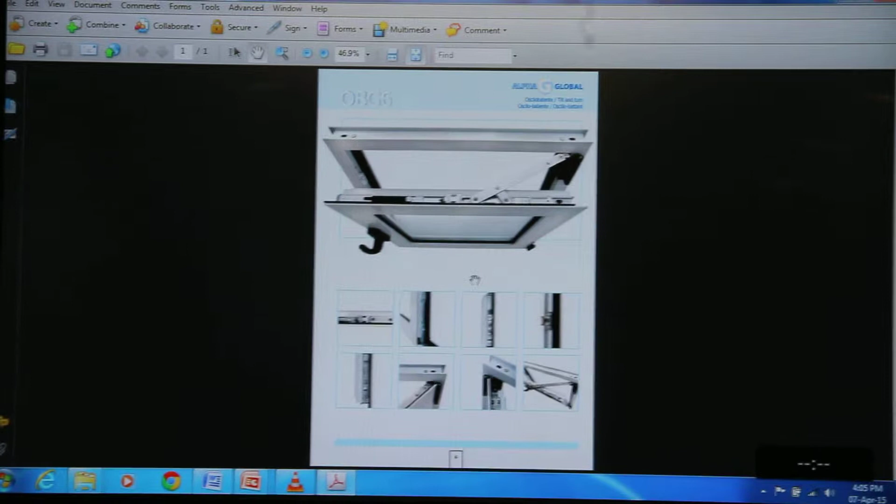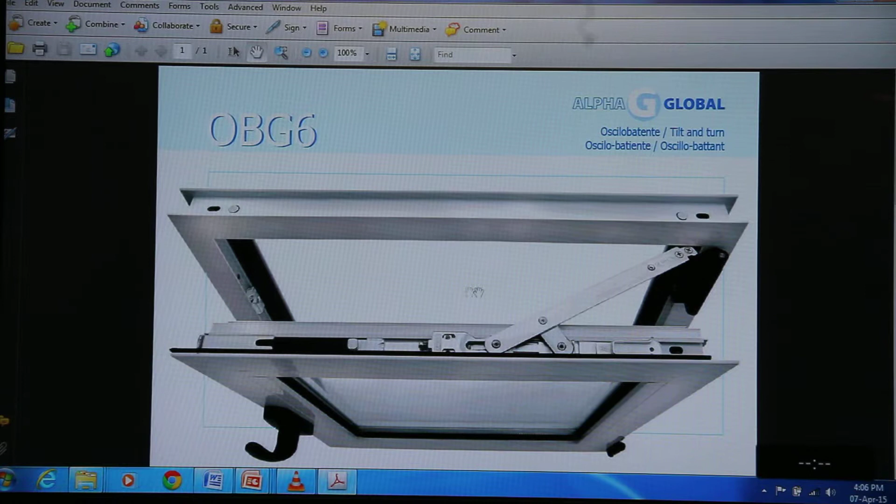Now let's see some specified window arrangements. This is the Alpha Global giving the hardware for the particular specified windows like tilt and turn windows, that is called the OBG6. We have the full kits of tilt and turn, in which first we need to understand what is the meaning of tilt and turn.

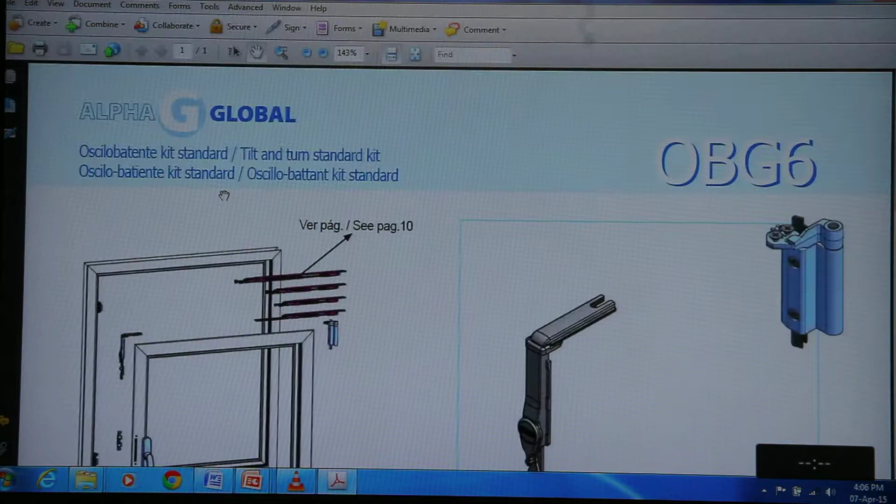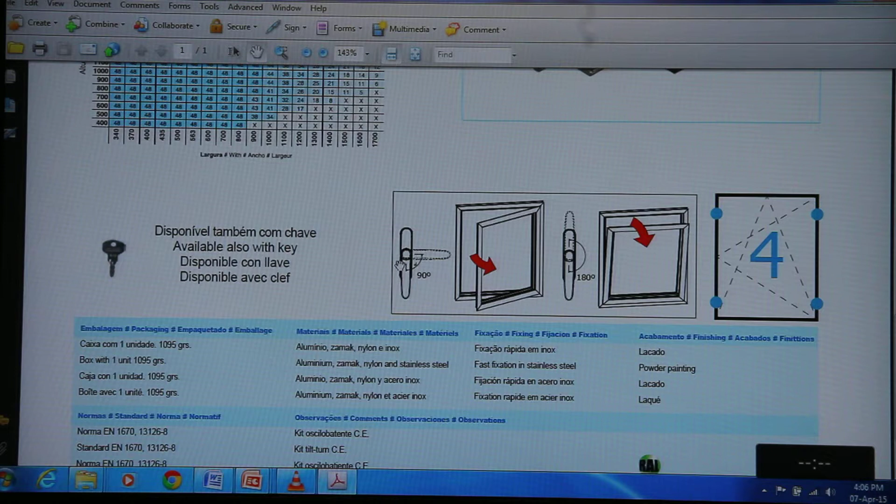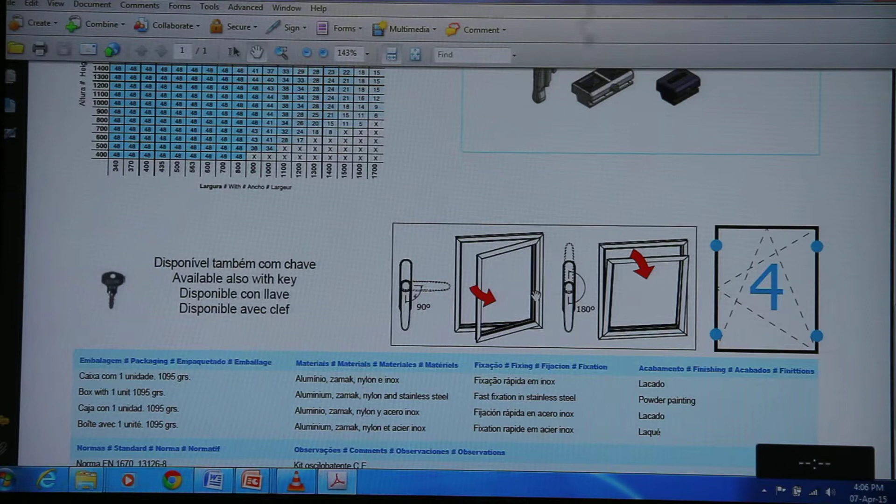Tilt and turn means you can first let the window tilt and then turn it, or you can first turn the window and tilt it after that. If you want to turn this window fully open, you can open it at 90 degrees. If the handle position is at 90 degrees, the window will open like a side hung window, and you will get full ventilation throughout. You can get cross ventilation.

If the handle is at 180 degrees, just against the floor, this portion will be open, and all the heat will be released from these sides. So this is called the 4 point locking.

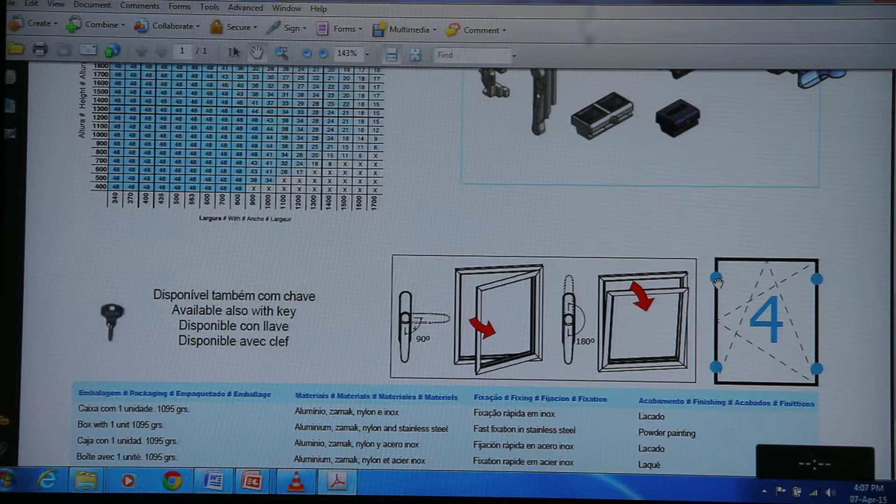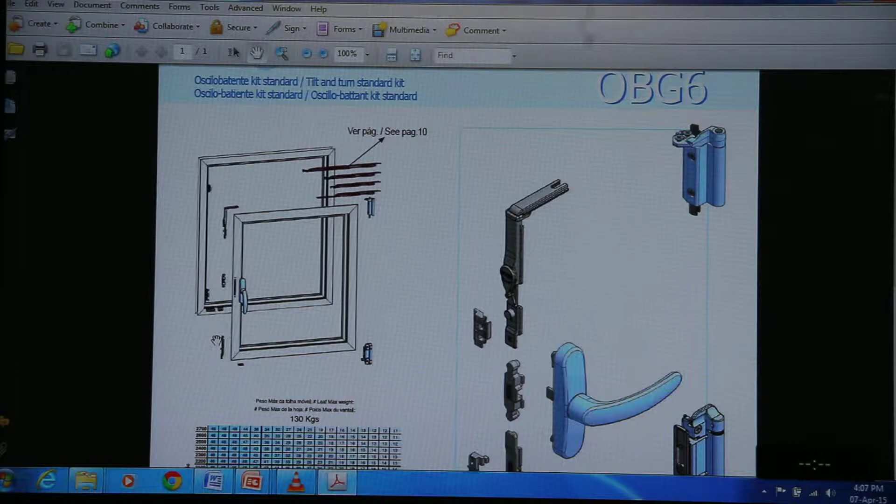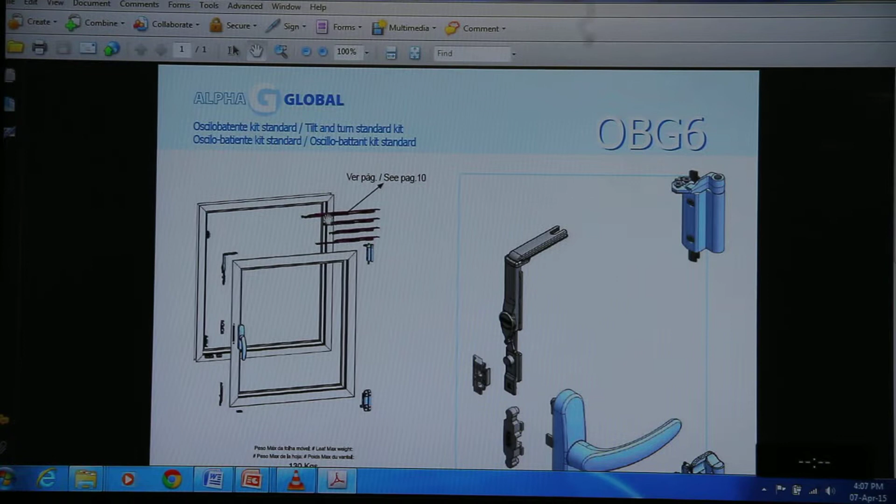In this image we can see how a window will be locked. The locking points will be provided here, here and here. So these are the locking points which will be given in this window. This is the handle, these are some corner transmissions, and these are the locking points. These are some other locking points which we need to give at these corner sides, and some arms are also there. So this full kit will come as the tilt and turn standard kit, and the specification is that it stands for 130 kg.

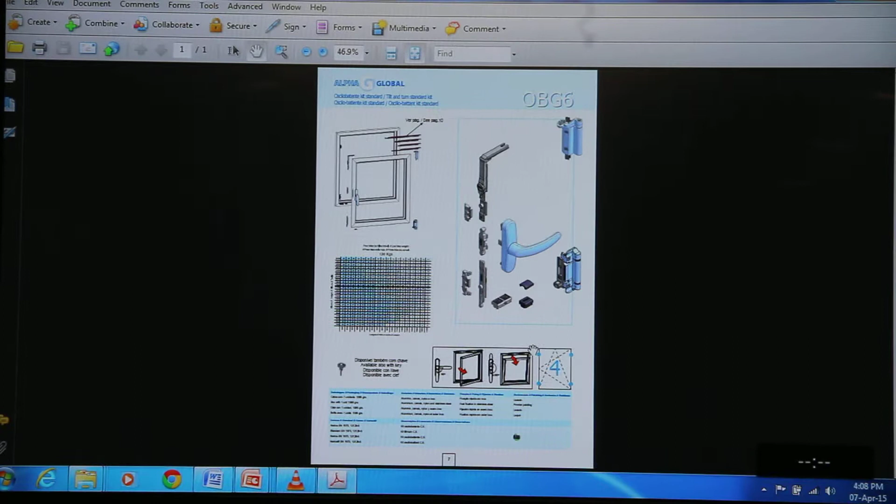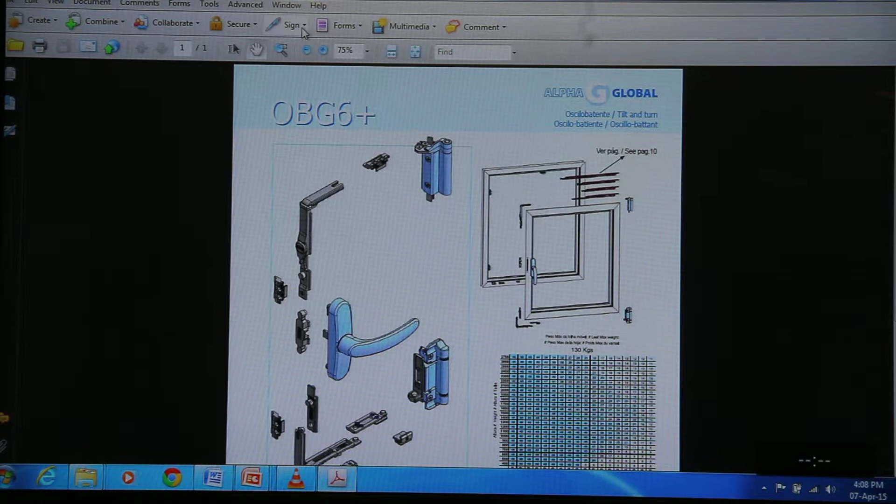Now let's see the OBG6 Plus. OBG6 Plus is for 6 point locking, and comes with an advanced version, so it looks like the OBG6 Plus.

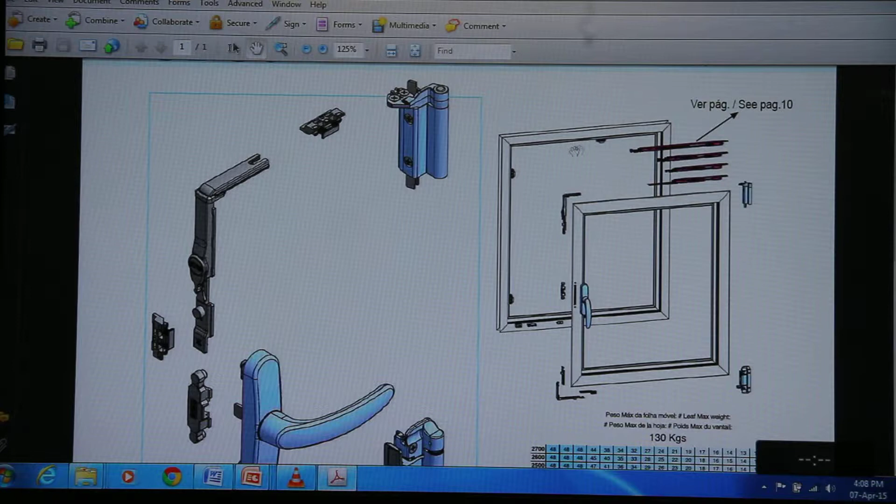Now let's see how it will work. So here is the handle position and rest elements, corners, locking points are like this. These are the locking points where it's going to close. This is also the same as what we've seen before.

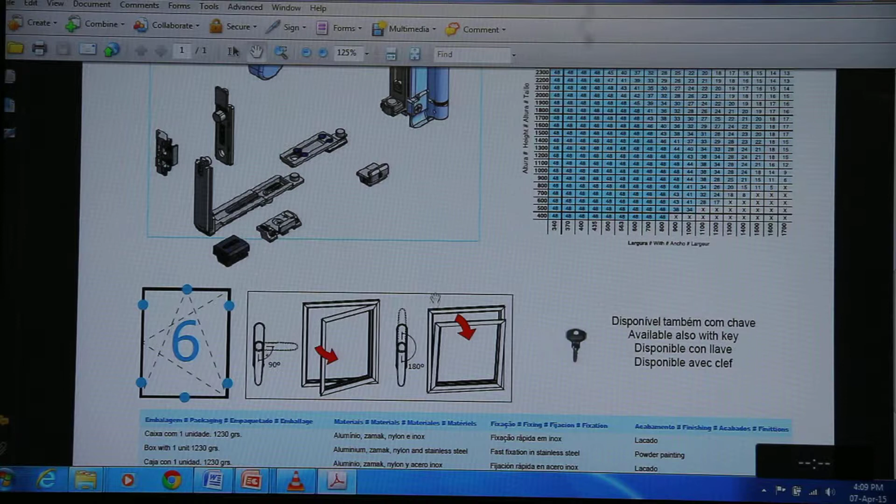If you turn it to 90 degrees, it will be fully closed or fully open, and when you turn it to 180 degrees, it will open from the upper side. Due to this you can get full cross ventilation, and due to this position you will get the release of warmness coming from the roof. It's also applicable up to 130 kg.